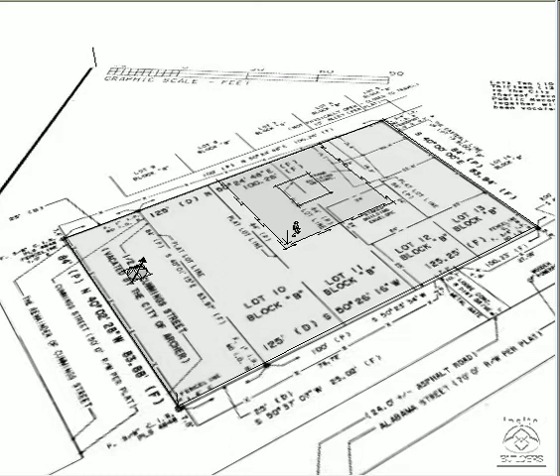This video is to give you a quick idea of the construction process detailed in this book. Here's the survey laid over the site again. Note the work points, north arrow, and the footprint of the building. Let me zoom in. I turned off the survey so we could see the footprint a little better.

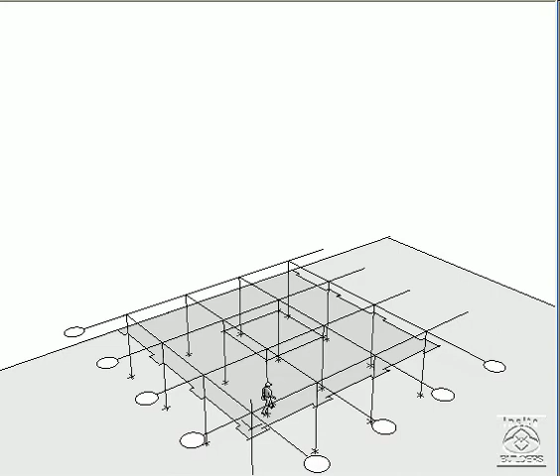On the footprint I have column lines. These column lines define the intersection of the center of the column, vertical column in this area. Here are those verticals. These are the floor lines that define each one of the floors in the building. I can make those a little clearer by making them opaque.

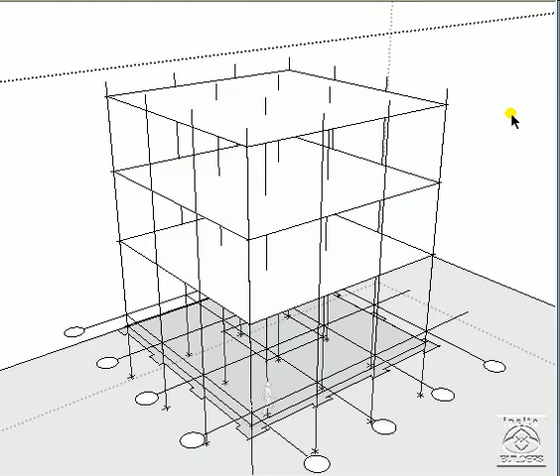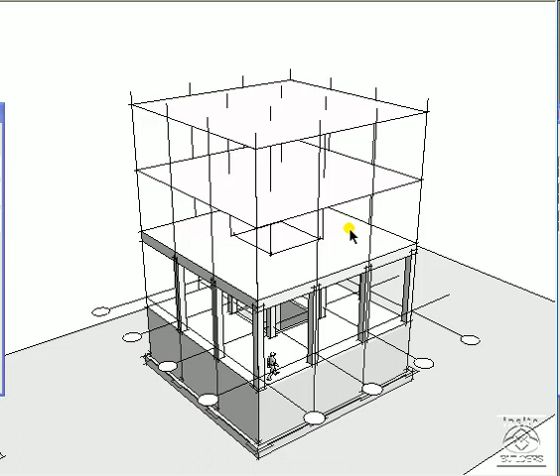So that gives us an overall sense of what's going on with the layout of the building, both horizontally and vertically. In Chapter 2, we start the foundation for the building itself. In Chapter 3, a raised slab is put in place over formwork supported by the basement floor. In Chapter 4, a concrete frame is erected for the placement of hollow core concrete floor planks.

Chapter 5 is the first steel framework to go up. It has steel decking and lightweight concrete. Chapter 6 is another level of steel framing, this one to receive bar joist or lightweight steel joist on the frame. Once this level of steel is put in place, then the entire frame is plumbed.

Plumbing a frame means attaching guy wires in a diagonal pattern in order to rack the frame and get it aligned vertically. Once aligned vertically, then shear walls and shear bracing can be put in to stiffen the frame. Those cross bracing support the frame laterally in this direction, and the welded joints support the frame in this direction.

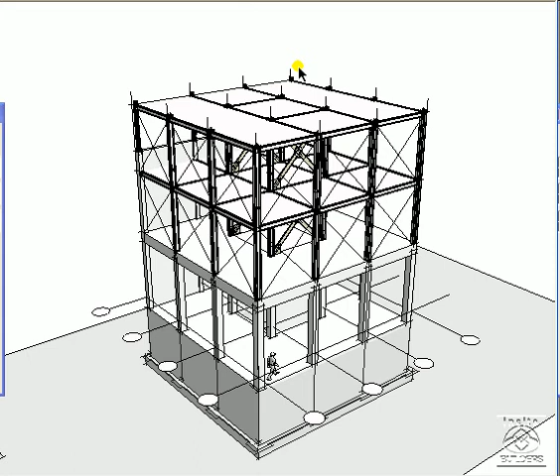When both are in place, then the guy wires can be removed, and precast panels can be put in back. These precast panels are similar to the wall panels or curtain wall panels that will go around the skin of the building. The bar joist can go up any time after the building is plumbed.

These bar joists are put up in bays. These are assemblies of several joists with cross bracing in place so that the crane can lift them and set full bays at a time. That's not only for the efficiency of the construction, but also for safety.

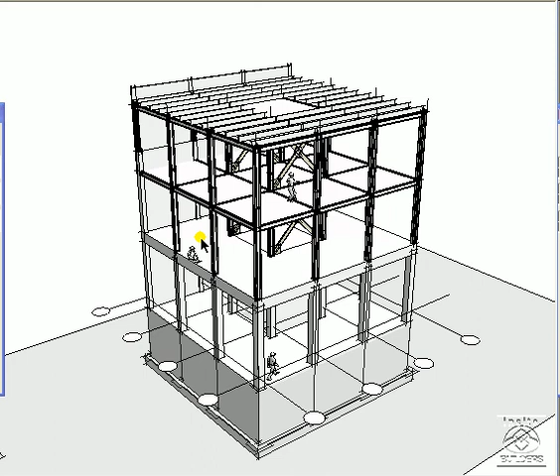The forces working on the building are rather complex, but they can be broken down into two simple categories: gravity and lateral. Gravity forces include the weight of the building and all of the loads that are imposed on the floors of each. These floor loads are transferred to the beams that then transfer to the columns and take them down to the foundation.

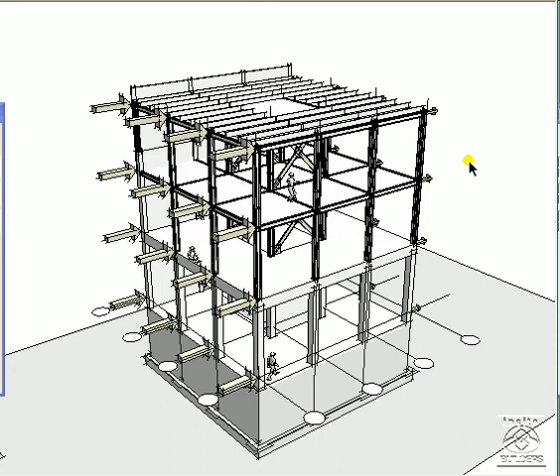The lateral loads act on the sides of the building. These are wind and seismic loads. For wind loads, there's a corresponding suction on the opposite side of the building that's smaller than the main load. With all the loads acting on the building at the same time, you can visualize the kind of resistance this frame has to give in order to be a safe and well-constructed building.